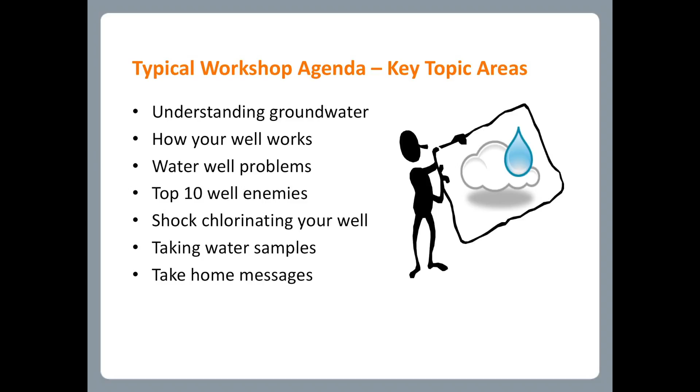Typical workshop, we start with understanding groundwater, which is a video that talks about the water cycle and shows a lot of the things that the display model did here. We talk about how wells work and how they're constructed, common water well problems, the 10 most likely things to pollute or contaminate your well, shock chlorinating your well as a maintenance item, taking water samples, and wrap up with some take-home messages. That whole workshop usually runs 3.5 to 4 hours, depending on how many questions there are and who's doing the talking. I lead the workshops, and people from agriculture, environment, health and the Drilling Association come and help with the presentation.

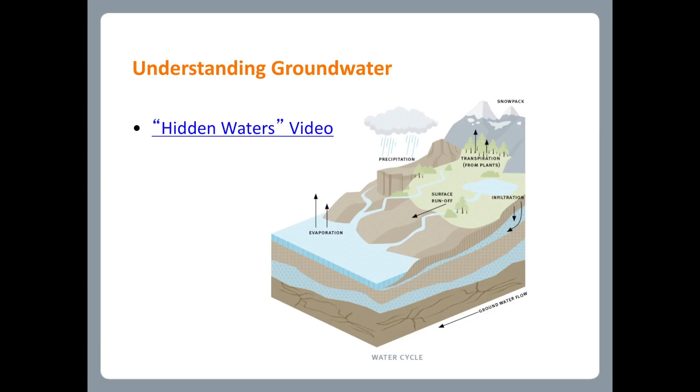So understanding groundwater, as I mentioned, is basically a video, the Hidden Waters video, that's available online as well. We do that to give a basic understanding at the beginning. Then we talk about how wells work and the key components of the water well. Starting with, obviously, you need a hole, so the borehole. Next item is the surface casing, which goes in the hole to keep the borehole open, house the pumping equipment, and help exclude undesirable aquifers.

So drillers will quite often what they call case off an undesirable aquifer to go down into the water that they want. John talked about those surficial aquifers. They're usually gravelly, they're always harder than heck and often have a lot of iron in them. People don't want that in their house, so they'll case it off with the surface casing and go down into deeper water below.

A really important part of the well is what we call the annular seal. The borehole is usually about this much bigger than the surface casing. So if that's not sealed properly, surface water can sneak in along the top and run down, or these shallow aquifers can come in along the side of the casing and down into the bottom end of the well and contaminate the water that you thought you were getting. So that annular seal seals the casing into the ground and prevents mixing of aquifers and contamination from the surface, and there's a variety of different ways that drillers will do that.

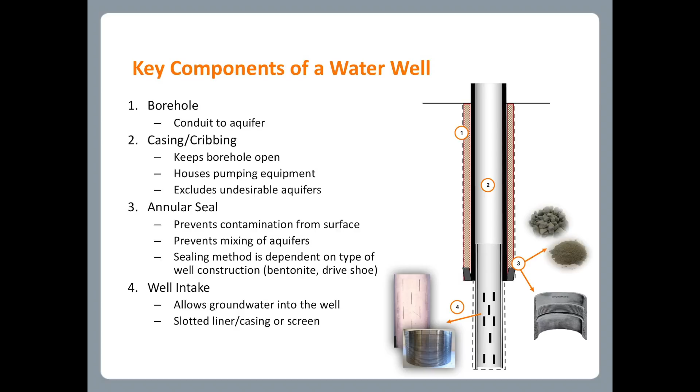The vast majority of our wells in central Alberta and the Red Deer River watershed area are bedrock wells that John talked about, permeable sandstones, fractured shales, fractured coals, and in those cases there's usually a plastic liner down the bottom end of the well with just slots cut in it, maybe with a skill saw or electric drill, or a cutting torch if it's an old steel liner. So that's where the water's coming in.

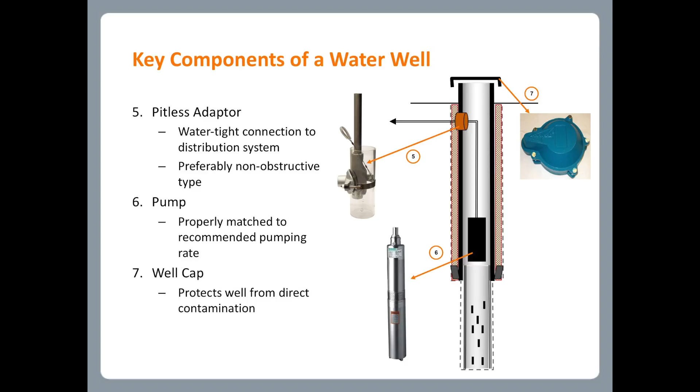Then the water's got to get out of the well, so we talk about pumps a little bit and pitless adapters, which make that sanitary frost-free connection down about 8 feet below the ground, so the water can come from the pump through the side of the casing and off to where you're using it without freezing. And a well cap, obviously you don't want kids dropping things down the well, so well caps are really, really important.

So we talk about the typical bedrock aquifers, which I mentioned earlier. It's not uncommon, especially when you get west from here, to have what we call open hole completion, where there's a bit of surface casing and then a bare naked borehole down in the sandstone. Not very often done anymore, but there are some still around.

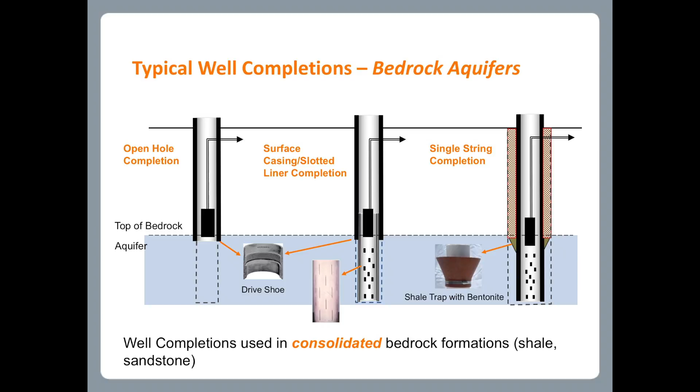This type of well has a surface casing that goes down to wherever the surface casing goes, hopefully to eliminate all but one aquifer, but not always. And then a liner down here, and there's a single string construction where there's one size of casing all the way down and an annular seal above whatever point they've sealed that at. Surficial aquifers, I mentioned, going down into a sand or sand and gravel, stainless steel screen down there.

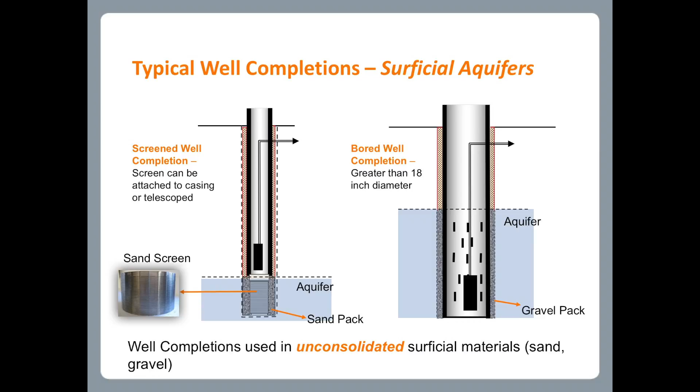In the northeast part of the province, there's a lot of these old bored wells that are larger diameter. They're put in areas where the water is quite low yielding and fairly shallow, and the main idea is you've got a big reservoir of water underground. So if you've got a 2-foot cribbing with water in it, you've got almost 20 gallons in every foot of depth of storage down there, and that gives them usable water where there may not be otherwise.

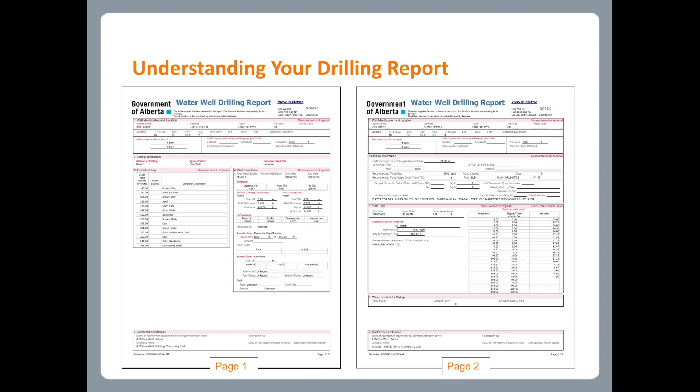We talk about well drilling reports. Every well is supposed to have a well drilling report, so we explain to people what's on them, and we really quickly go through that. Then we do a little exercise, a do-it-yourself part of the program. We call it a workshop for a reason, because we put people to work a little bit.

We print off well reports for everyone that's coming. We get their land location when they sign up. We print off their well report, and most of the time we can find them, but sometimes we can't, because wells didn't have to be reported until about the early 70s. So there's lots of old water wells around that have no well reports.

So we give them a template and their well report, and I highlight the pertinent information on the well report. I highlight the borehole information, for example, in orange, the surface casing information in green, the annular seal information in purple, the intake portion in pink and blue. There's the slots in the screen showing up there. And we'll go to the second page and draw the static water level in the well, where the water sits when it's not being used.

Artesian conditions were mentioned. Most of the wells that I deal with in the province are slightly artesian. They're not flowing artesian, but they are artesian in that you hit the water at, say, 150 feet, and the water level comes up to 50 feet from the surface, for example, due to those artesian pressures.

And the drilling report's supposed to recommend a pumping rate and a pump depth, so that's highlighted. We get them to draw that in if it's there. And if they have a little bit of time, we get them to draw the lithology along the side so they can see where their aquifer is.

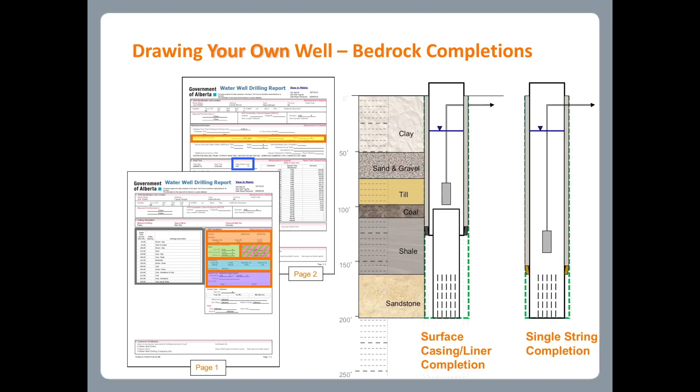So in this example, here's a slotted liner here, and it's down beside a sandstone, and that was the aquifer. And the annular seal information, you can see where the surface casing was sealed into a fairly tight material, which would be, in our example here, a shale. And then we do a similar thing with the surficial wells with the same idea with screens and slots and that kind of thing. Yeah?

So I was just wondering, does that drilling report transfer, like if I were to buy a property where there was a well? Does that transfer in the sale of the home to the new owner? The drilling reports are filed at Alberta Environment, so you can go on the internet and at the end, I think I've got a slide here that you can go on there and put in land location.

It'll bring up all the water wells on that land location, and you can search by land location, by owner's name, original owner's name, like the original owner of the well, but usually the land location is what people search by. So they are filed, but if it's an old well, it may not be there. If the driller wasn't very good at paperwork, sometimes it's not there. Sometimes the computer input is wrong and it puts something west of the 4th meridian instead of west of the 5th, and sometimes they get lost that way. But for the most part, hopefully they're there.

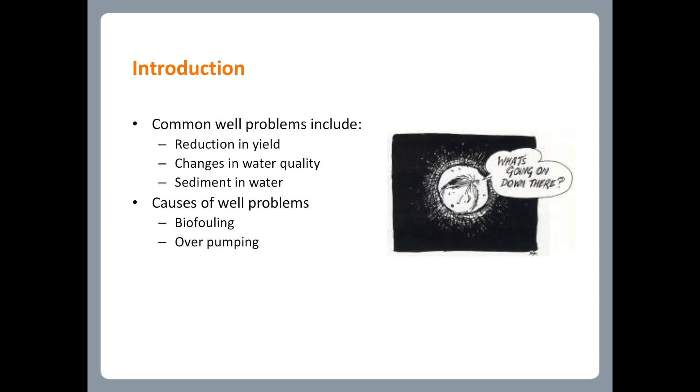We talk about well problems, mainly things that cause reduction in yield, changes in water quality, sediment coming into the water, and the main problems of those typically are biofouling and what we call overpumping. And biofouling is caused by nuisance bacteria that grow in the groundwater in the wells. They'll tend to clog up the slots where the water's coming into the well. They'll clog up the pump. They'll clog up some of the material, the aquifer materials, and reduce the yield.

Create some problems. The two major ones would be what we call iron-related bacteria that, for the lack of a better explanation, feed on iron. They create a red slime. Sulfate-reducing bacteria are a similar type of bacteria that are anaerobic. They give the water the hydrogen sulfide odor and give you black slime problems. And there's other ones as well, but those are the two big ones that we talk about.

And just the act of drilling a well and pumping it aggravates these things. We used to think they were a contamination problem, but now the information is, hey, these things a lot of the times were naturally present in the aquifer, but the fact that you've developed a well there makes a happy place for them to live, and you'll aggravate the problem.

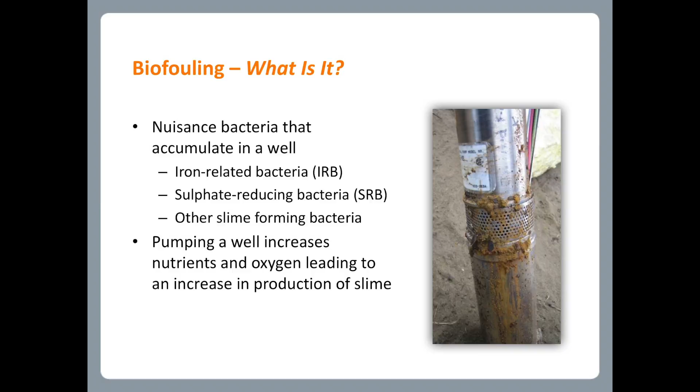We have some downhole footage that we show from the downhole well camera showing what some of this stuff looks like right down in the well.

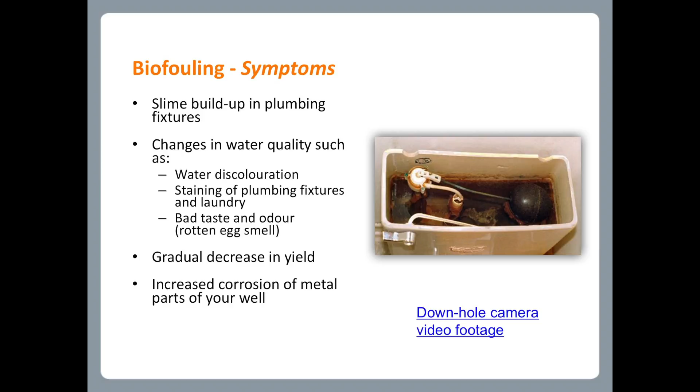So normally wives aren't allowed to look at those, just the husbands are, because wives are a little more sensitive to that kind of thing, but some of these are pretty ugly.

So we talk about what the whole format of the workshop is, what the problem is and what you can do about it. And so what we're talking about as the only tool a homeowner typically has is regular disinfection or shock chlorination of the well. And usually that's got to be started early in the life of the well, because as that slime layer gets thicker and thicker, it creates more and more of a problem, and it's harder and harder to remove.

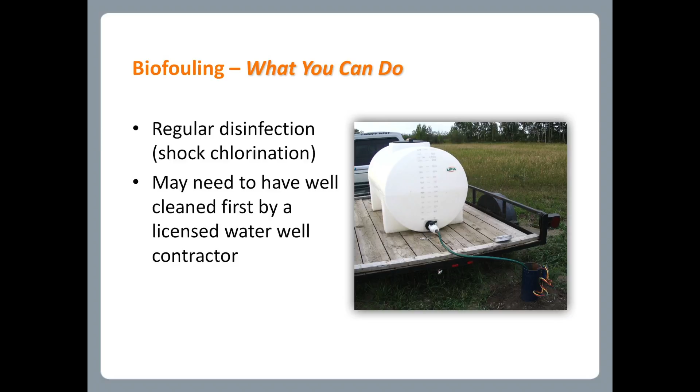And at some point, you may be better off to have a driller come in and professionally clean the well before you're going to have much luck with the shock chlorination. So it's a maintenance thing.

The other thing that keeps coming up in the workshops is overpumping. That's pumping the well harder than it really should be pumped. And that's one of the things. Our aquifers are fairly limited here. It isn't uncommon in this area to maybe have a well that's only good for 1 gallon or 2 gallons a minute. That's just the way it is.

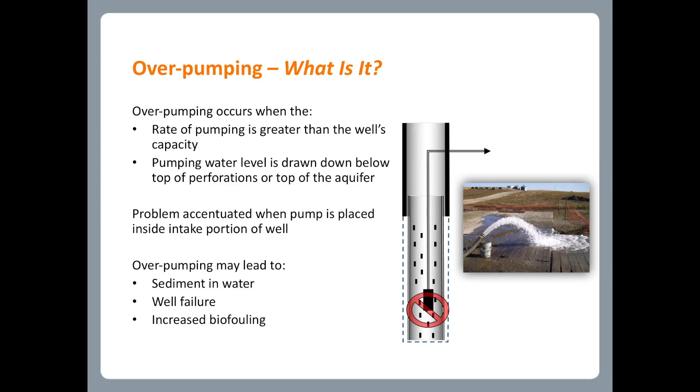That's all you've got. And by pumping that well too hard, you create all kinds of different problems with aerating the water to aggravate those biofouling bacteria, having water washing down the side of the borehole and removing some of the sediment, or just moving the water so fast. The faster you move water, the more sediment's going to move, and the same thing potentially can happen in your well.

We usually do the top 10 well enemies, but I just put 2 in here for today. Number 1 on our hit list is old, abandoned, and unused water wells. There are thousands of them around the province. We saw in the little well model here, when you put a contaminant on that sandy surface, it travels through. The fastest way to put it in there was like she did with the contaminant. She put it in the well, and it went choom right down to the bottom of the well, and then went across and contaminated something else.

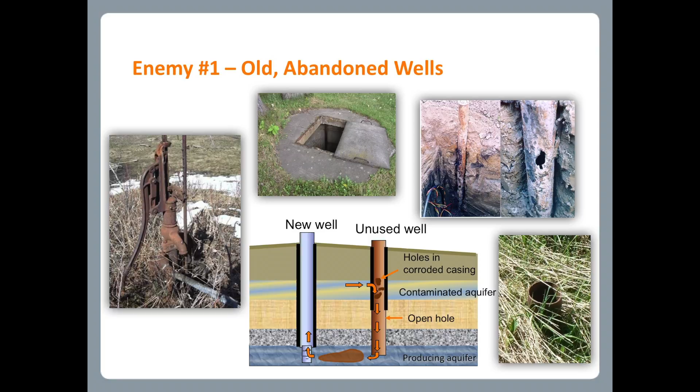So these old wells are a problem, and most of them have old steel casing. Steel casing doesn't last forever. It gets corrosion holes in it and that kind of thing, and you can get an old well with corroding casing, holes in the casing, an undesirable or contaminated aquifer here, it's going to run down the well and it's going to create a contamination plume, which when you pump the new well, it's going to create a problem in the new well. So that's one of the things on our hit list.

We encourage people to plug and decommission those wells, and ideally we like to see it done by a well driller, so it's hopefully done properly, but we have fact sheets in the binder that talk about plugging wells and that kind of thing, and so that's one of the issues that we try and deal with.

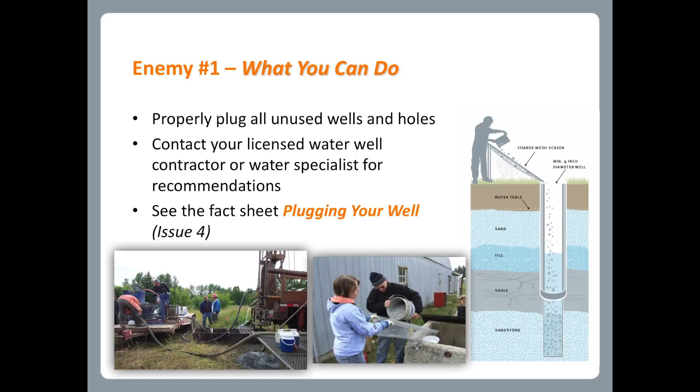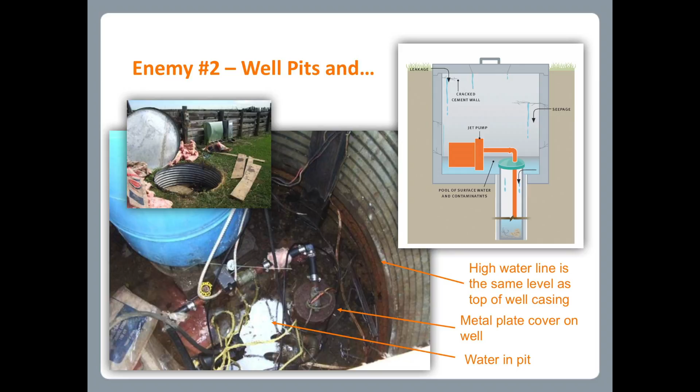Number two is well pits, and these aren't even legal anymore. They haven't been legal since 1993 to put these in, but they're really common in the old wells. And that's where people would dig out a pit around where their well is to house their pumping equipment down below ground without having it freeze. It seemed like a good idea at the time, but it isn't such a good idea because it becomes a funnel for contamination, surface contamination, shallow groundwater seepage contamination, and just all kinds of different things happen.

And they're not, we talked about coal bed methane a little bit earlier. There's a water well that was up near Camrose. A lot of their aquifers are fractured coal formations. That's the only water they have. It just happens to have gas in it as well because it's in a coal formation, and enough came out of that well one day to blow up the house. So that's another issue around well pits and around wells actually in basements as well.

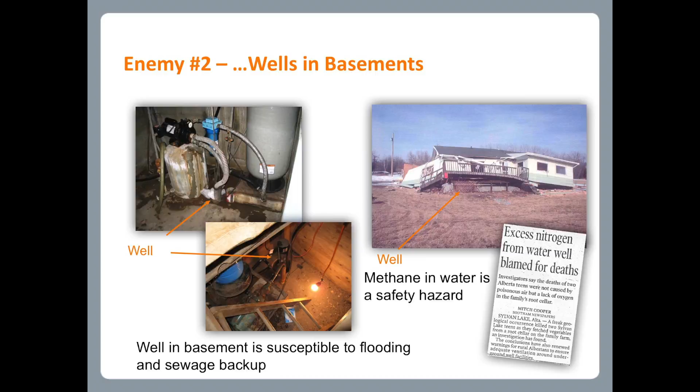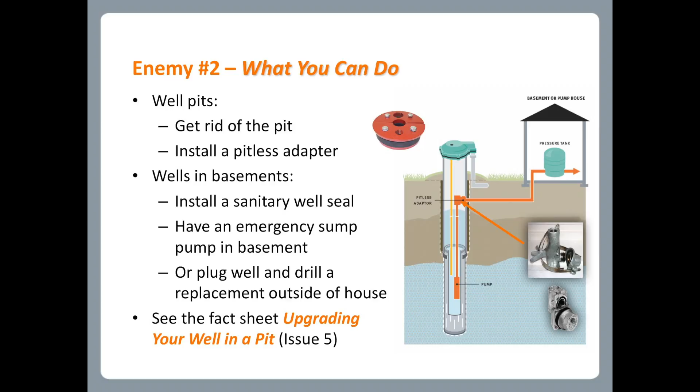Plus, if you're in a well pit, if there's a confined space down there, if there happens to be nitrogen coming out of the well, which sometimes happens under some kinds of well construction, people can suffocate and die down in these things, so they are dangerous from that aspect as well. So what you can do, obviously getting rid of them, or temporarily dealing with them, they may be able to put a sanitary well seal on them, that kind of thing, but it's just one of the two high-risk situations we have with wells.

You asked about shock chlorination. We talk about how people would do that, and there's a fact sheet in our binder. The binder we hand out to everybody at the workshop looks like this. It's got all the slides from the presentation. It's got a whole series of fact sheets in it. This is the one on shock chlorination, but they're all in the binder as a resource for people to take home. And basically we talk about when you shock chlorinate, and the drillers always chlorinate after they're done with a new well.

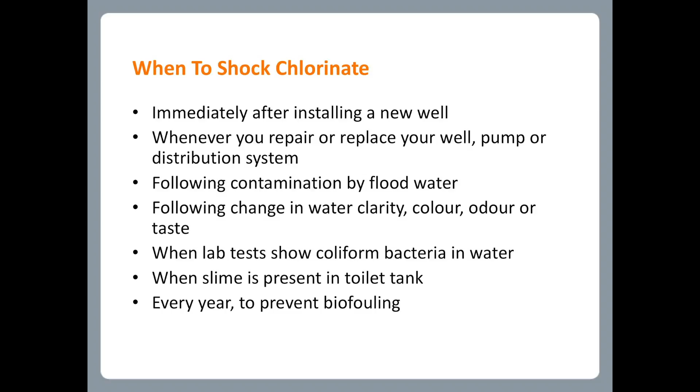Contamination, water problems, lab tests coming back with high bacteria, slime in the toilet tank, all that kind of stuff is when you might shock chlorinate. Nothing is without risk, so we try and warn people, hey, there's some potential problems here. We say the key one is more chlorine is not better. The stronger the chlorine solution, the less effective it often is, and the more corrosive it is.

And if you've got an old well that's got a steel casing that's already 3/4 rusted out, and you put more chlorine and pump it and do all kinds of things with it, you may create some other problems that were going to happen anyway. You just speeded them up a little bit by the chlorination process. And once again, often it's not a bad idea to have a licensed well driller deal with some of those older wells.

We recommend on the chlorination they stay below 200 parts per million chlorine solution, making that solution with either household bleach or industrial bleach, which is just 12% instead of 5 1/4. That stuff has a limited shelf life. It deteriorates in storage, so we tell people don't buy a bunch and save it for next time.

And they can also mix a solution up with granular or pelletized chlorine. And the key thing there is to make it into a solution. You don't dump this dry stuff down the well because it can cement the pump into the well. It can corrode the pitless adapter, corrode the casing, and cause all kinds of problems there.

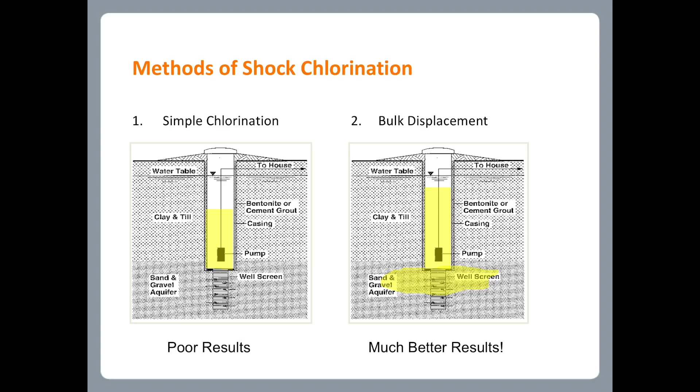We recommend what's called the bulk displacement method, where we calculate twice the volume of water that's in the well bore, mix the chlorine in it to make a 200 parts per million solution, run that down the well, which gives enough extra water to hydraulically push some of that chlorine out into the formation around the well. So that whole calculation process is one of the fact sheets in the binder.

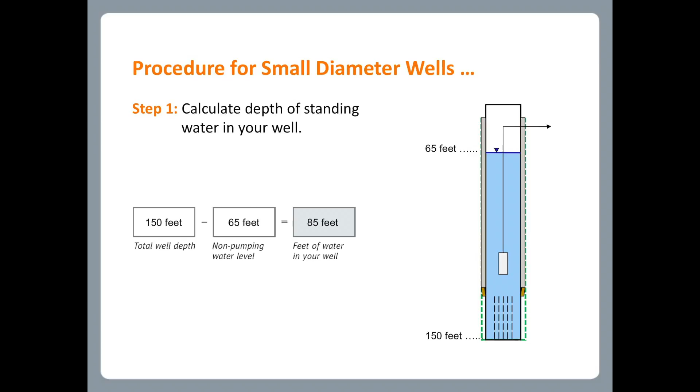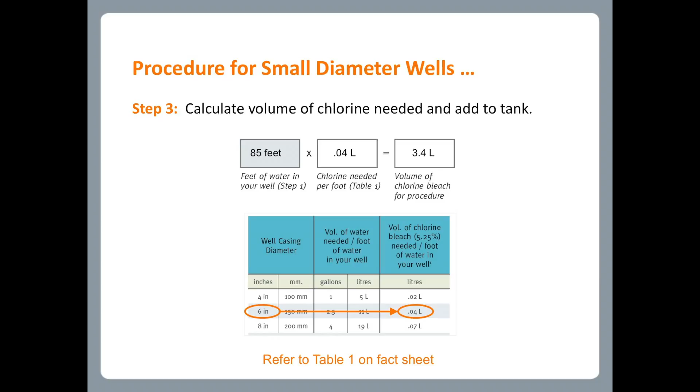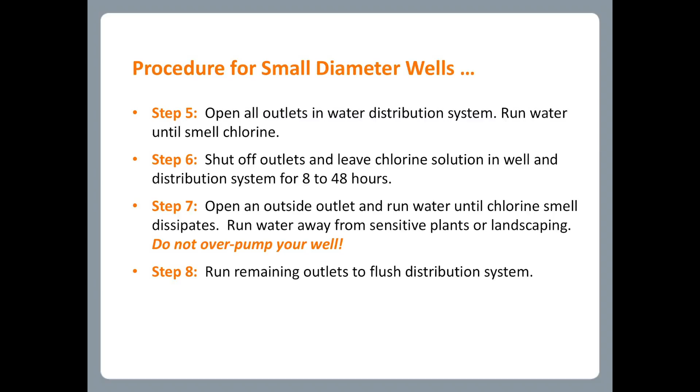We kind of go through that with people, figuring out how much water's in the well, how much water they're going to need to make that 2 times the volume, and calc that out. And these calculations are all in the fact sheet. And then we figure out how much chlorine they're going to need, and talk about putting it down the well, flushing it through the whole system, letting it sit, and at the end of the day, you let the system pump out and clear the chlorine out of the well, and flush everything all out.

We also mentioned pH adjusted chlorination. The higher the pH of the water in chlorine solution, the lower the effectiveness of the chlorine for killing bacteria. The pH around here for a lot of our groundwater is around 8. So at 8, chlorine's only got about 12% of its biocidal effect compared to 100% at 5.5. And when you add chlorine to it, you actually raise the pH higher than that. So you can potentially raise the pH easily up to 10, which has a biocidal effect of less than 1% of what it had originally.

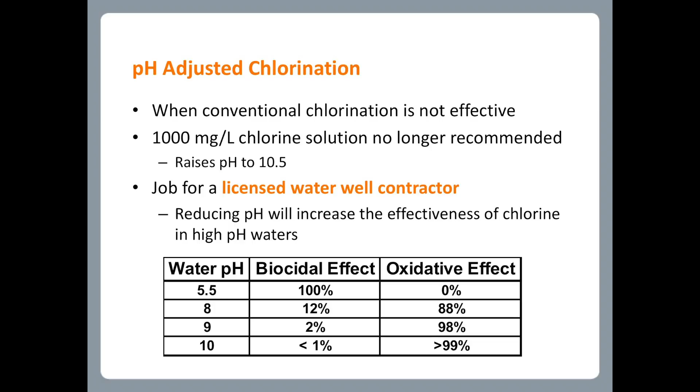So sometimes the drillers are setting up to add some acids to the water to adjust the pH to get better chlorine, a better kill. We talk about taking water samples. You have a health inspector come and talk about that: when to sample, how often, how to get the sample to the lab, and that kind of thing.

The health centers take the samples, but they do not take agricultural water samples. They only take samples for human consumption. They don't take mortgage transaction samples. They don't do samples looking for dissolved gases. They don't do samples for the effectiveness of water treatment equipment, and they don't do samples when the paperwork is not done right.

The labs are accredited. They get thousands of water samples a year. It's a waste of time for them to put out information that's got some inaccuracies with it right from the beginning. People looking for those sort of things go on to fee for service. John had mentioned heavy metals and that kind of thing. They're not normally part of these samples.

If you want a trace metal analysis done in your water, you have to convince the health inspector that you have a reason to look for that, and then he's got to call the lab and make an arrangement, and then he actually often has to go out and take the sample because a lot of those samples are acidized with nitric acid to stabilize things. So they have to take the sample and take it back in. So it's significantly more time and effort and cost for that.

And for the arsenic, they've got some special arrangements for the arsenic situation where people are checking the arsenic levels around the province. I haven't talked to anybody right around here that's doing that yet, but some of the health offices are.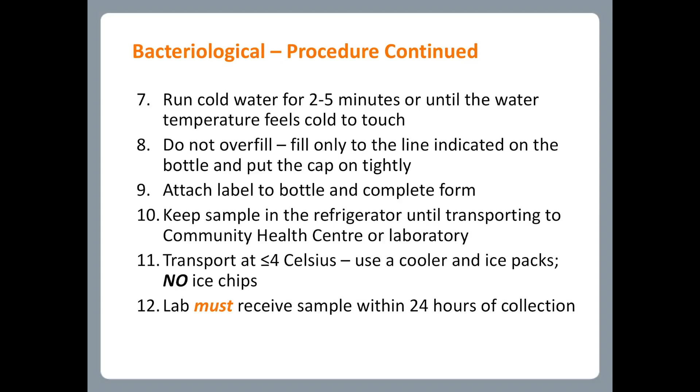Bacteria samples, key thing on those: the health offices take those samples, but the big important thing is the sample has to reach the lab within 24 hours of the time it's taken. So it's really critical. Every health office has a window of opportunity to drop samples off so it can be picked up by the courier and taken to the lab and tested within 24 hours, or else the lab throws it away and you get a phone call, you've got to take another sample. I've talked to people who have taken 3 and 4 samples before they finally got one in because things went wrong for one reason or another.

The paperwork I mentioned is really, really important. Something as simple as somebody not circling AM and PM on their form gets the sample thrown away, and they've got to go take another sample and take it into town. It's not such a big deal on the close Highway 2 corridor here, but if you live at Hinton and you live 20 miles out of town, it's really a pain in the butt to get all the ducks to line up.

Basically, they're looking for presence and absence of coliforms and E. coli in those bacteria tests. They're not looking for those slime-forming bacteria that I mentioned earlier. That's not part of the test at all. It's just coliforms and E. coli.

Chemical analysis tests, similar sort of thing, except they're not time sensitive. It's really important that the paperwork be done right and that the sample makes it to the lab. They'll get results for the 16 different parameters, the basic things: pH, sodium, chlorides, fluorides, that kind of thing. And if there's anything specific they need to look for, they have to talk to the health inspector about that.

We wrap up with take-home messages. It's really important we tell people to keep good records about their well and monitor water levels whenever they get a chance. You've got to keep those records yourself and file them and be able to pass them on to the next owner, or have them for your own use. If you get in a dispute with somebody, and the oil and gas situation always comes up as a good whipping boy on this one, if you think something has happened and you don't have any evidence to back up what you had before, you don't have much of a leg to stand on in an argument between you and somebody else.

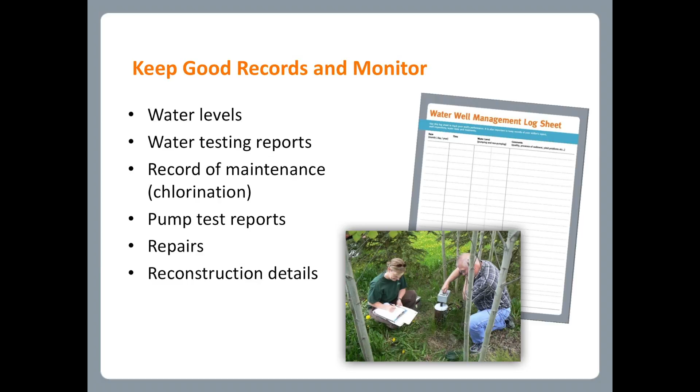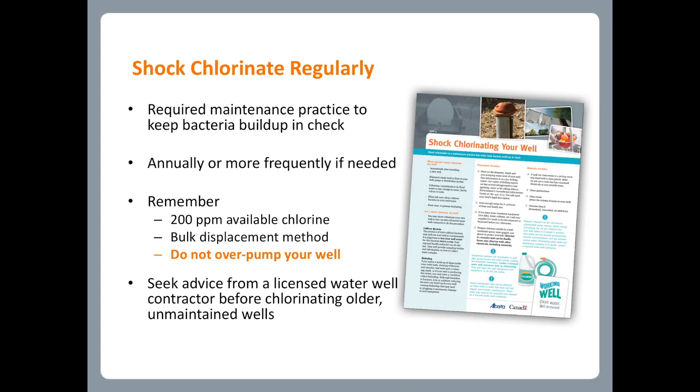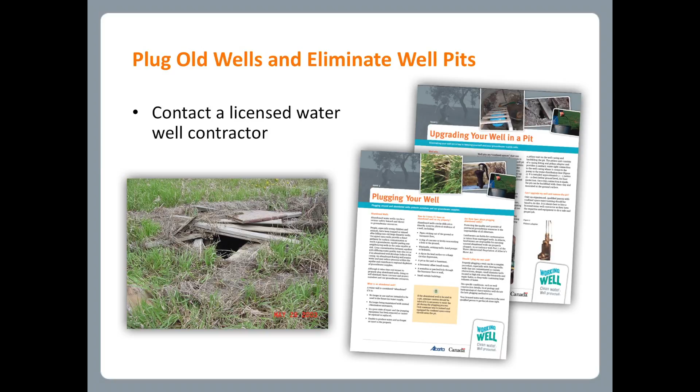We talk about shock chlorinating on a regular basis as a maintenance practice to keep the bacteria from getting too slimy and too thick and too much of a problem. We talk about testing water on a regular basis, bacteria tests and chemical analysis, and health offices have those. And we also talk about eliminating old wells and getting rid of well pits whenever you possibly can. Fact sheets are in the binder, as I mentioned. Evaluation forms I mentioned already. We phone people back 6-8 months after the workshop.

As far as what's been achieved, from the surveys, 98% of the participants strongly agreed that the workshop increased their understanding of how their wells work. 98% agreed the workshop provided information that was helpful in maintaining and managing their wells. 79% said they would test their well water. This is a commitment to act. 74% said they would keep records of test results and maintenance, so people are hopefully going to file that stuff. And 63% said they would regularly inspect their well and the area around it to make sure there's no water ponding around it, the cap is secure, and that kind of thing.